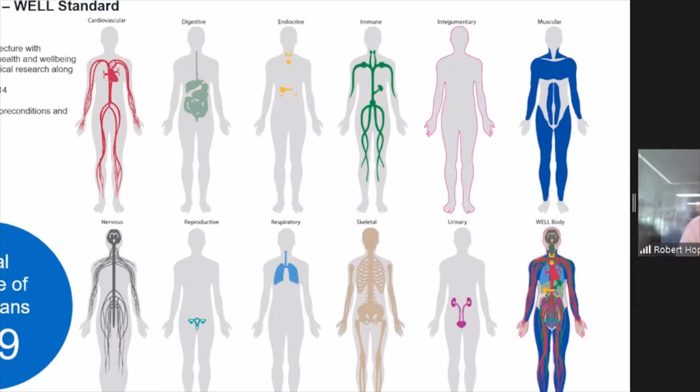That number down on the left-hand side, that's where we currently are with our points. So we needed 80 to score platinum. We're actually scoring 109 at the moment. So when we say it's one of the healthiest buildings in the world, it really is, because we just integrated all of the values of WELL into the building at the briefing stage. It really didn't cost us too much to achieve the standard. And it also meant that we could really max out and go for as many points as possible.

And very simply, there's 10 areas that WELL standard splits itself into: air, water, nourishment, light. You can see those on screen, and you can score a maximum of 12 points in each of those areas. There is more than 12 points available in some areas. There's less than 12 points available in others, but we were really keen to push as hard as we could to score as many points as possible.

So this is the building. It's right in the new Knowledge Quarter in Liverpool. It's a very striking building. The pattern on the outside is called a Voronoi. That was named after a Russian mathematician from the early 20th century that developed this mathematical idea. And essentially, that is the pattern that we have on our human skin.

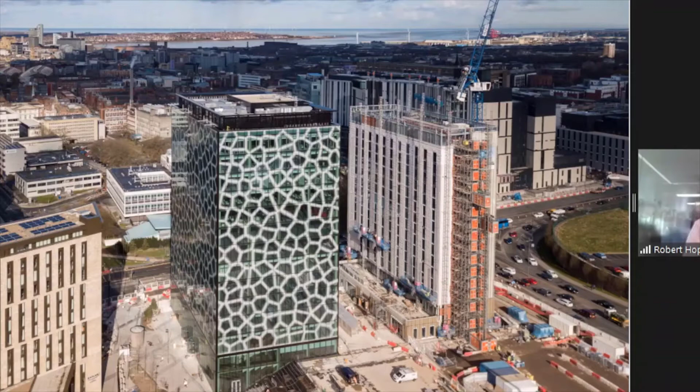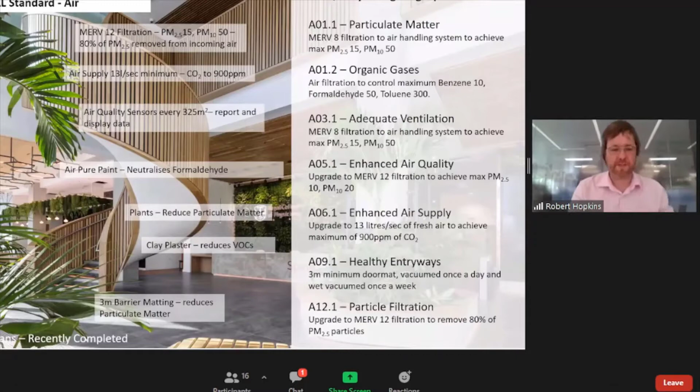We developed this pattern on a macro scale so you could see it from across the city, but then also on a micro scale. So there's 23 million polygons that are all unique on the facade, and you'll see some of those in a moment. Not to go through every single point that we went for in the building, but we set up this rule that just said you'll feel better when you walk out of the building than when you walk in. And we used WELL standard to make sure that would happen.

For instance, the air supply in there goes in at 13 litres a second. That keeps CO2 levels down to between 800 and 900 parts per million. So what, you might say? Well, that has about a 10 to 20% increase in cognitive function by keeping a really low level of CO2.

The filtration in there, we've used MERV 12 filters, which again, you'll say, so what's a MERV 12 filter? Well, what a MERV 12 filter does is it takes out the very small particulate matter in the atmosphere. And that's really important in our post-pandemic world, because the coronavirus sits around that PM 2.5 module. That MERV 12 filter takes 80% of those out of the atmosphere. So it makes it a very, very safe environment for people to be in.

It also means that lots of really dangerous, cancerous type particles from the outside just can't get into the building. There's lots of sensors in the building. Every 325 square meters, there's a sensor. They're linked to displays, so you can see how much CO2 is there. You can see what particulate matter is there.

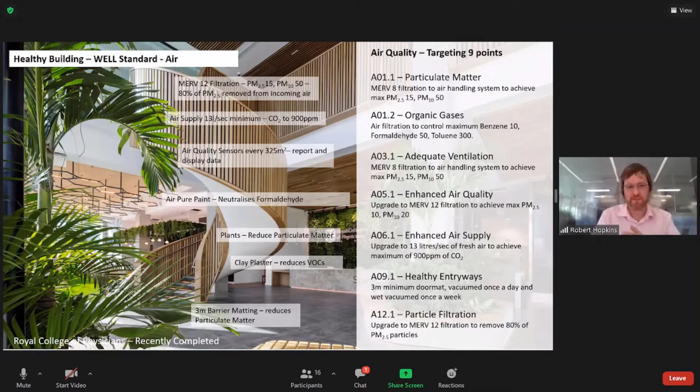And so we've selected plants that remove toxins from the atmosphere and photosynthesize more than other plants, so the oxygen levels are higher in the building. Again, where we've got plaster, we've used a clay plaster inside the building, so a real focus on materials that would give a really good quality of air.

In terms of light, we've set up really nice rules that say that every single workspace is within 7 meters of the glazing. So that means that everyone has a brilliant view. It's the highest point in Liverpool, 360-degree views, absolutely incredible. You can see all the way across to Snowdon, down to Shropshire, Peak District, Pennines, up the Lancashire coast, the most incredible views. And again, that nourishes the mind.

It's not a distraction to people. It's something that actually makes people more effective in the workplace. It also means that you get connected very closely to your circadian rhythm, so your sleep pattern. So on average, people will sleep about 45 minutes extra a night in a much deeper sleep because they're very closely connected to the sun and a natural circadian light. Your body really knows when it's morning, afternoon, and evening, and that's something that can easily get lost when you're in a deep plan building all day.

We've got lots of biophilic lights in the building, so all the plants have a special lighting system that's independent of the main lights for humans, and they just focus on helping those plants live. So they know how long to stay on. They can turn off to help the plants sleep at different times. So it's been really interesting that we've got a human lighting system and a plant lighting system in the building.

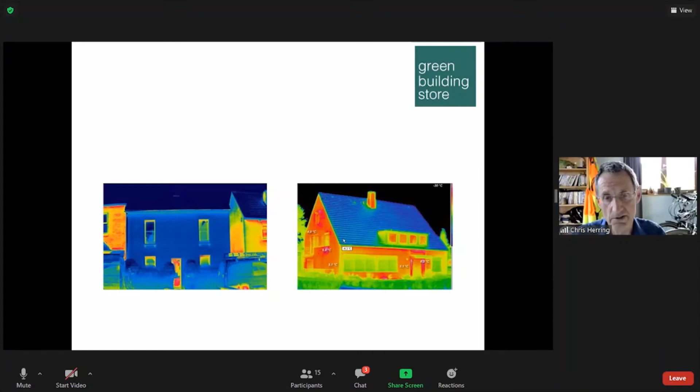The blue house on the left is a thermographic image, and obviously the colder the colour, the colder the building. That means it's not leaking heat. That house is actually in a street in Hereford. It's the first passive house retrofit in the UK. And you can see that it's losing very little heat. The house on the right I grabbed off Google, but basically it could be most new builds in the UK, and a lot of other existing housing stock, leaking lots of heat. And that's the story we're looking at really with Passivhaus.

But if we're going to move beyond building regulations, and as individuals we often want to do that, and Mike's given a very good example of the work he's done, but also as a country, we need to move beyond current building regulations. We need some signposts with something on them. And this is where Passivhaus really comes in.

Passivhaus is about energy efficiency. This is Dr. Feist, who with a group of colleagues developed the concept. We'll see a little bit more in a minute. And it's all about minimizing the heat needed to make us comfortable in the building. But the other sides of Passivhaus, of course, are comfort and a very healthy indoor environment.

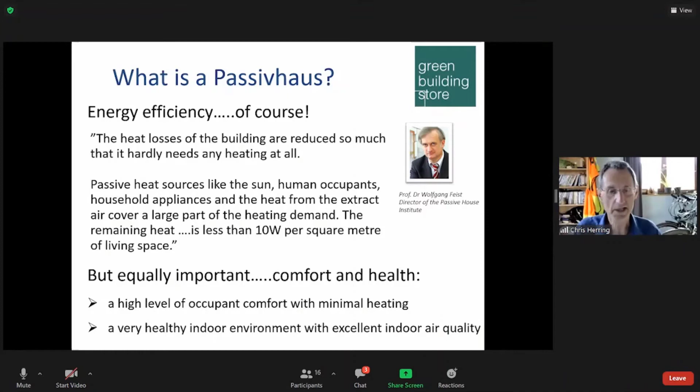Now, you can build on that further with something like the WELL standard, and the WELL standard goes very well with Passivhaus. People have certainly experimented with that as well. But fundamentally, if you build to Passivhaus standard, you will get a much better indoor environment than you will with a conventionally built house at the moment.

And the important thing to bear in mind is the performance gap. Now, Dr. Feist, when he was looking at this, was looking at the efforts to increase the performance of buildings in the 70s and 80s, and people were doing that and not actually getting the reduction in energy that they expected. And that gap between what you think you're going to get and what you do get is called the performance gap. And Dr. Feist set out to find out why. He built these experimental houses in the early 90s, and out of that has grown the Passivhaus standard.

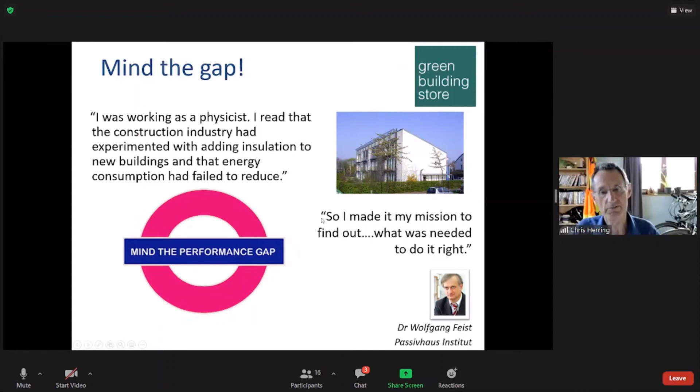So what is it? Well, fundamentally, what we build now is in effect active. We allow heat to leak out of our buildings, and then we put heat in to make us comfortable. With a passive house, we reduce that heat loss as far as we can, as far as sensible, and make ourselves comfortable by not losing heat, and then putting a tiny amount in just to top up.

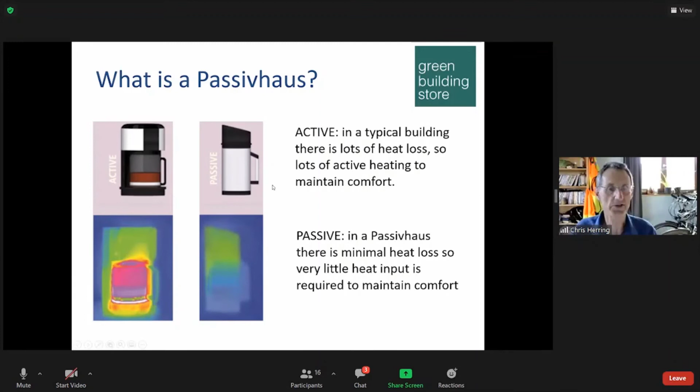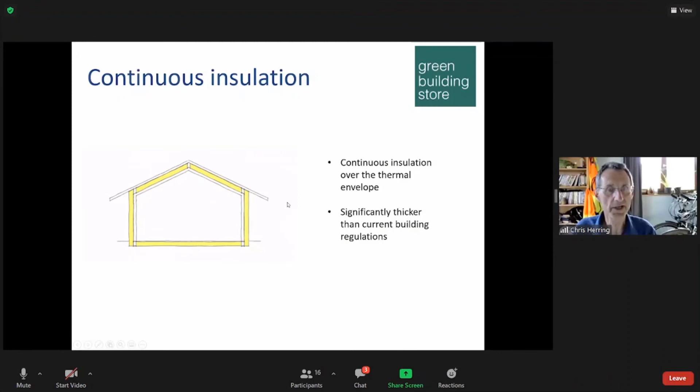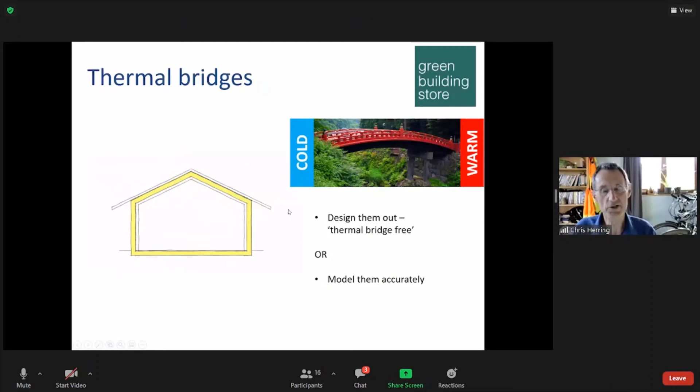And these are the things we need to do. Mike's already talked about all of this really, but continuous insulation, and quite a lot of it, rather a lot more than we use in the current building regulations. We need to particularly eliminate thermal bridges, places which we often ignore at the moment. We're not really driven to do that rigorously, but in passive house you are, so those have a real effect on the performance of the building.

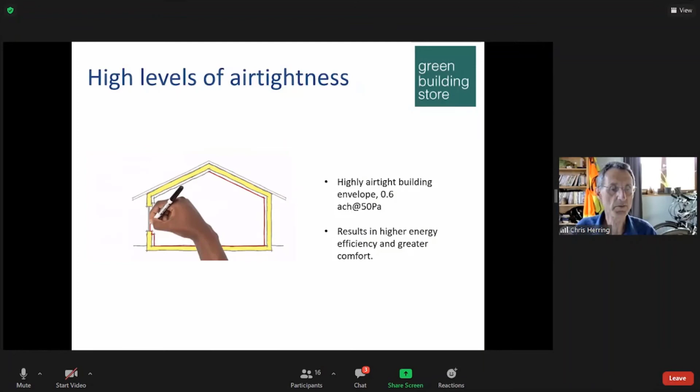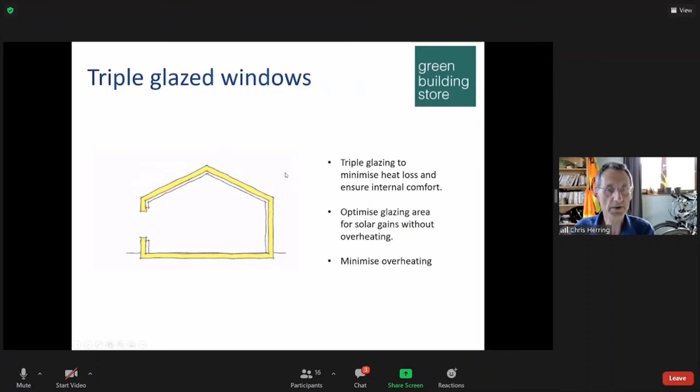High levels of air tightness, and Mike certainly talked about that, and we need buildings that are sealed. There is no point insulating if you don't make a building airtight as well. Typically passive house is about 30 times more airtight than current building regulations. We will use triple glazed windows in this climate. They will give us the optimum performance. And then, sorry, I jumped too fast there.

There we are. And we will need a mechanical ventilation system that recovers the heat from our outgoing air, but also ensures that we get optimal ventilation. And that means we get much better comfort and much better air quality. People worry that sealed buildings are unhealthy or feel unhealthy. Most people go into a passive house and say, oh, it feels fresh. It's a nice feel to it. We do need to think about orientations.

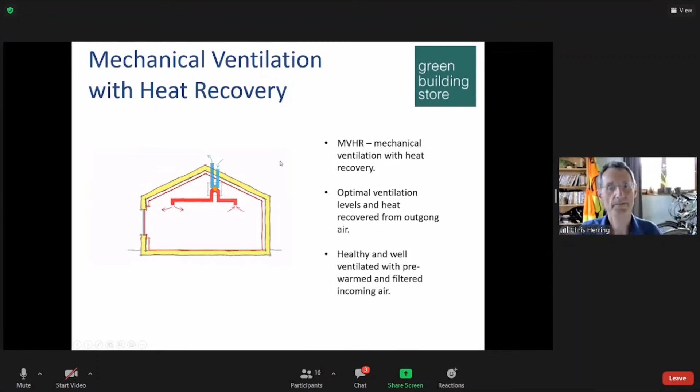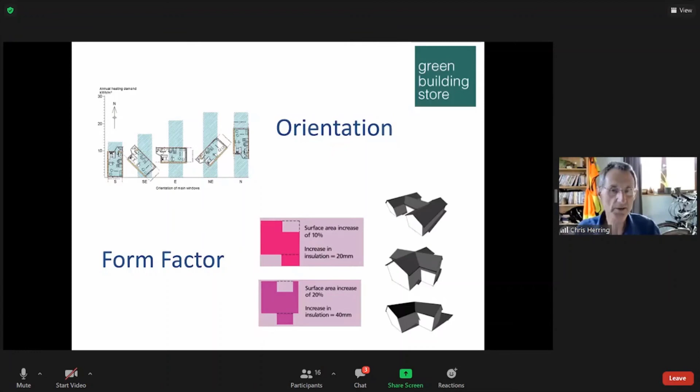Mike mentioned we're not rigorously bound to face south, but we need to model it and make sure of the full performance of the building. If you have all north-facing glazing, the building will not perform as well. And we need to think about the form factor, the surface area in relation to the floor area, because the bigger the surface area, the more heat loss. So we're driven to do that.

We need something that accurately models what the building does so that we know what we're building. I regularly get people saying, I want to super insulate, I want to do this and that. And I say to them, do you know what you're getting for spending this extra money? Do you actually know how your building is going to perform? And they don't. The Passive House Planning Package is a very efficient design and verification tool.

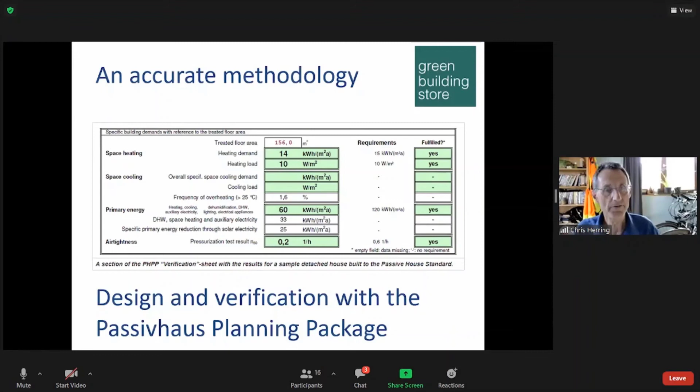And finally, what Passive House gives us is a quality assurance system. Now, we don't really quality assure our buildings. We quality assure nearly everything we have made, but we'll buy a house that is barely quality assured, that has minimal checking, if you like. And, you know, tragically, that's what Grenfell was partly about. So Passivhaus gives us a really high level of quality assurance.

There are some myths about Passivhaus, particularly that it's all about houses. And certainly there are lots of individual houses around the UK, but there are also larger developments like Goldsmith Street, which won the Stirling Prize a couple of years ago. This one here in Norwich, 100 odd units, or this project here in Camden, it's going to be 400 units eventually, all to Passivhaus standard. York is just developing a 600 unit residential development.

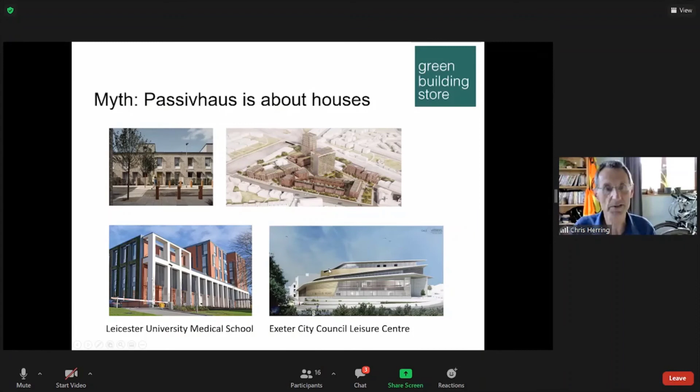But it's also about larger buildings. So the Leicester University Medical School, I think, is still the largest Passivhaus in the UK at the moment. And Exeter is developing a transport interchange and leisure centre to the Passivhaus standard. That's being constructed by Kier at the moment. So what you get, building Passivhaus, you get a comfortable building, you get a healthy building, and you get, obviously, energy efficiency, lower CO2 emissions, lower bills. So that's the package you get from it.

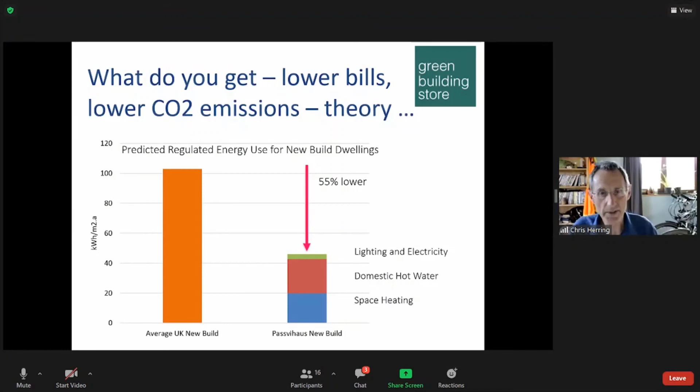And this is what we think we get. So again, this is estimated work done by the Passivhaus Trust, looking at regulated energy. That's the energy covered by the building regulations. And our calculations show that Passivhaus will, on average, be about 55% lower in theory. But remember the performance gap. So that was theory. What do we think in practice? If you take the average performance gap, we think it's around 60%, then a Passivhaus will be basically about 75% lower than the average new build in the UK.

The Committee on Climate Change agrees with us effectively. In looking at how new homes should perform by 2025, they said space heat demand 15 to 20 kilowatt hours per metre squared per annum. That is the Passivhaus standard. That metric basically comes from the Passivhaus standard.

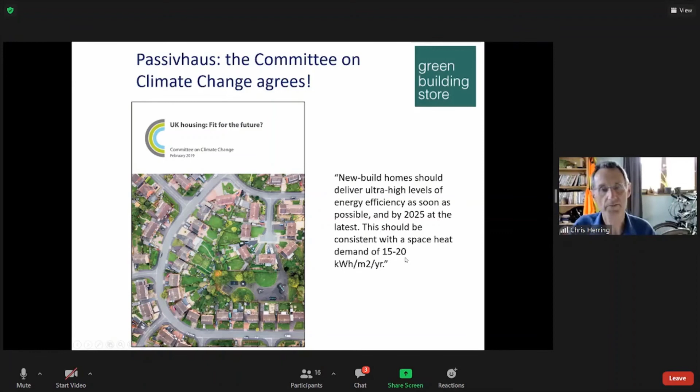And obviously we're looking at the Future Homes Standard in 2025. Net zero carbon is the metric we're working with. And we don't know where that's going at the moment. But what we do know, again from some work the Passivhaus Trust has done, downloadable from our website, is that the most efficient way of getting to net zero carbon in a building is to build Passivhaus standard fabric and then add on some renewables. That's the most efficient way of getting there.

Now, it isn't all about operational energy, of course. So what about embodied carbon, embodied energy? Well, there are different figures for this. This is work done by the London Energy Transformation Initiative, LETI. They looked at typical new build over the lifetime of the building. Around 67% in this case, they're saying, is operational energy, and 21% was embodied energy. So the obvious thing, the low-hanging fruit, is to get that operational energy down first. Passivhaus is a very good methodology to get there and probably most effective. Once we've done that, we should be thinking about embodied energy as well, of course.

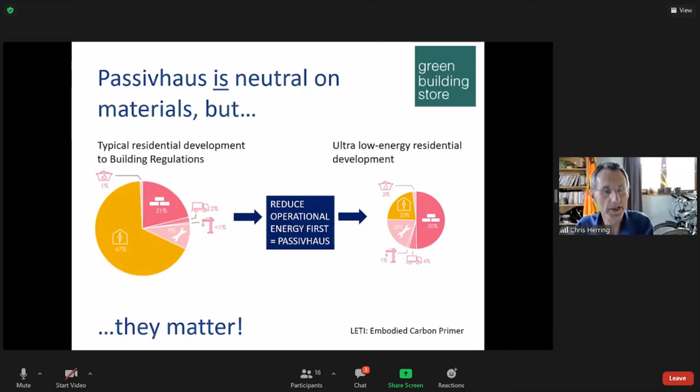And if we want to do that, Passivhaus actually has a very nice tool recently developed which models the operational and embodied energy through the lifetime of the building. You can put in your building once you've used your Passivhaus Planning Package, model it through and see what that total performance is. But of course, there's even wider impact we have to think about, the ecological impact. However we look at it, cradle to cradle or EPDs, whatever, we need to look at that.

It's very important. And many Passivhaus designers are working with those ideas as well. Passivhaus doesn't cover that. It covers the operational energy, but it's also very important, and I would never deny that we need to be looking at that and thinking about the materials we use. And it is a lot, as Mike said, about building houses too big. We need efficiency. We also need sufficiency. What do we actually need? And sometimes we can minimize our use of materials, and that will help, like Mike's sheep wool, for instance.

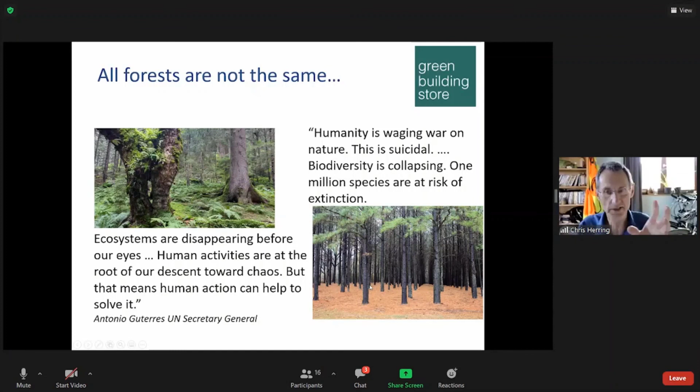So our plan or our ambition is to train the industry, as many people as we can within the industry. We've put 10% as the aim in the next 10 years, so that knowledge is spreading out. And we've got people with real expertise going out into the industry. And then we want to influence the whole of the industry. And we are already doing that. When people talk about Passivhaus, it really does act as a beacon. So we want to influence the lot.

And actually, interestingly, our head of policy and research has just been poached by MHCLG for a senior civil service post. So we have somebody with real building physics knowledge within MHCLG, which is quite unusual, because in my experience, most people there have actually got economics degrees or PPE, whatever it is. So I think that's really important, that influence.

So that's me. I think I'm just over 10 minutes, Chris. I'm sorry for that. Thank you for listening, and very happy to answer questions as we move forward. Fantastic. Well, what a wonderful introduction to the principle of the Passivhaus there, Chris. So thank you very much indeed for that, and a real sort of whistle-stop tour. I don't think I've ever done it so fast, Chris, to be honest. I appreciated that. I think all our speakers probably had much more to say, and certainly I know that you were virtually bubbling with enthusiasm there, Chris.